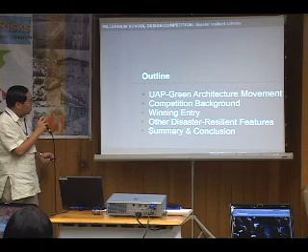I'll talk about what we are, because I think this is our first exposure to a multi-sectoral group. We'll talk about the competition which we launched, which came up with the ideas of disaster-resilient school. I'll cover in detail the winning entry, which will actually be built. And then we'll cover other interesting disaster-resilient design strategies in the other entries, and we will close the thing.

I'm given only 15 minutes. Okay, it's 5:10.

What are we? We are the Green Architecture Movement of the UAP. We were started in 2000, and because of the need to continue our advocacy, we decided to reform ourselves as the Green Architecture Movement. And the reason why we're pushing it very hard is because, admittedly, 50% of all the energy usage in the world is due to buildings. So we are the guilty parties, and that's why we're trying to offset our effects on the world.

I have a co-member of the Green Architecture Movement, Architect Casus, there in an orange shirt, so you can see him very easily, and white hair.

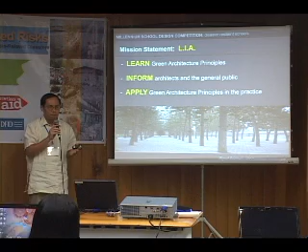So our mission statement is very simple. LIA: learn. We try to learn the principles of green architecture because every day there's always something new about green architecture. Second, we inform the architects as our primary objective, and then we inform the public in general. So we have actually several sessions on that. And then we apply green architecture principles in our practice.

Project modules, well, we have continuing education for members. We have a green forum every year, to which the public is invited. This year, we're holding it on September 4 and 5 at SMX. It's an open seminar. We talk about green architecture, etc.

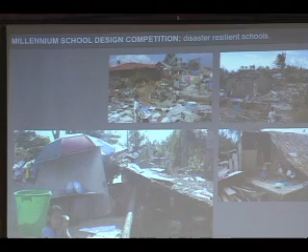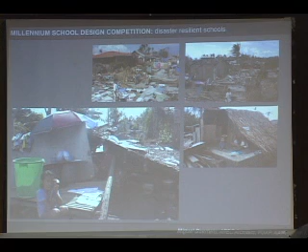Okay, now we start so that I can get the most out of my 15 minutes. We see this thing every year. Houses being blown by typhoons. We know that typhoons are going to hit us every year. Yet, every year, the same story. Houses get blown. Where do they go? Evacuation centers, which are supposedly the schools. These are the schools. Every year, the same thing happens to the schools. It's blown away, and they are supposed to be the evacuation centers.

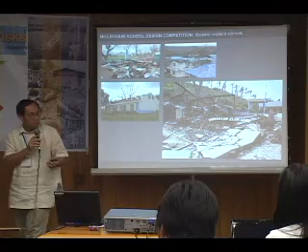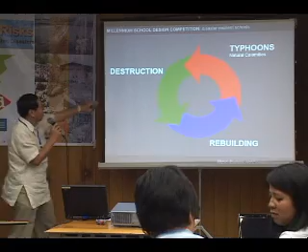So that's why, because of this cycle, we decided to look at something, the competition. Every year we know that typhoons are going to come. It's inevitable in our country. The typhoons bring about destruction. We rebuild. But what are we rebuilding? We are rebuilding exactly the same structures which we built before the typhoon, knowing very well that it will be blown away the next year. And we go through the whole cycle.

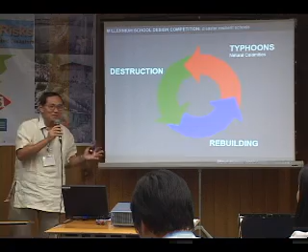In this, one time, somebody mentioned to me in private, "Negosyo yan." Sorry, there are foreigners. It's a business. Okay? So if there's construction every year, money moves, right? So I said no. As a group, we decided no, we're going to change this. So there was a group called Be Better, Build Better. It's a project in which we try to break this vicious cycle of calamity, destruction, and rebuilding.

So the partners are the following: National Disaster Coordinating Council, DepEd, Department of Public Works and Highways, the private sector, Disaster Management Network, I don't know if they're here, My Shelter Foundation, Philippine Green Building Council, Red Eye, which actually promoted the thing, and us, the United Architects of the Philippines.

Of course, the first step was to do a school. Why did we start with the school? Because they're the evacuation centers. Let's first fix up the evacuation centers and the schools before we move on to the houses. So we created this competition. We called it the Millennium School Competition. And the criteria was this, very briefly.

First, we decided let's have a design-build competition. Not only a design competition, because sometimes people join design competitions not worrying how it's going to be built and leave the headache to the people who are going to build it. So we said, you win it, you design it, you build it. Okay, so that means if you're going to design something, make sure it's going to stand up.

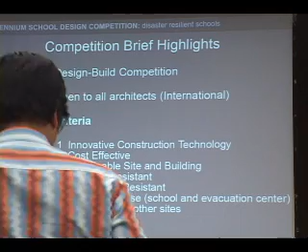Second, we opened this thing to all architects all over the world, anybody who wanted to come in with their ideas on how to design a disaster-resilient structure. We had 7 criteria. Number 1, innovative construction technology. In other words, if you do a standard school building, which looks like any other school building, you're out. Okay? Innovative, something new, something different.

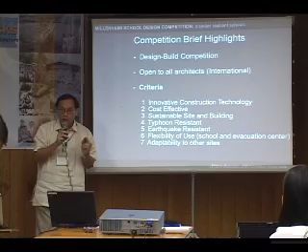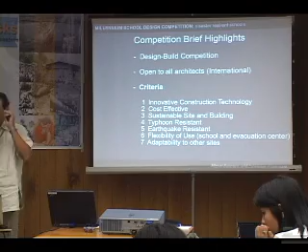Second, it had to be cost effective because the target which we're looking at was a public school. Third, sustainable site and building. Well, because we're the green architecture movement, we try to make sure that that whole school was going to be sustainable. Fourth, the most important factor in the Philippines is typhoon. Okay, this happened, so that's the most destructive.

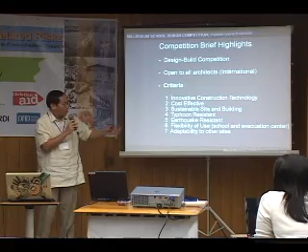Fifth, earthquake resistance. Sixth, flexibility of use. That school building can be used as a school and at the same time should be used as an evacuation center. And lastly, 7, adaptability to other sites. In other words, you can replicate that concept anywhere else in the Philippines or anywhere else in the world for that matter, which have the same conditions.

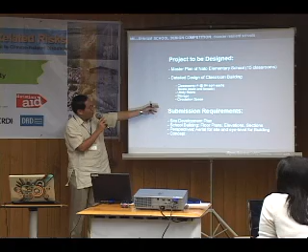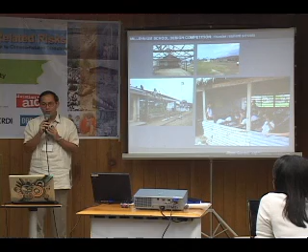So what we asked the competitors was to first design the master plan of a school, then detail 1 classroom building, and then they were supposed to submit the following boards. So, what site did we choose? We picked a site on the eastern shores of Camarines Sur, in a small town called Sagnay, and a small school called Nato Elementary School. So this is the site.

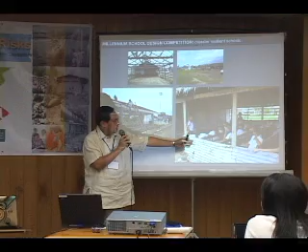Okay, we came in because of the typhoon. There were 4 classrooms which were in this condition, and before the DepEd was starting to rebuild, we said, okay, wait, reserve that site for us and for our competition because we're going to build the prototype in that area. So as you can see, the school, that's the building there, the whole school. This is how the temporary building looked like.

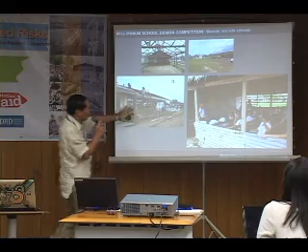And here you have the DepEd starting to build the same classroom they built last year and the years before, which got blown away every year. So anyway, we told DepEd, teka muna, reserve this site for us. So we went into this competition. Winners! Amazingly, the first place winner went to a Malaysian architect, Elida Himil, who received a prize of $10,000 US, and when she won, she donated it back so that the building could be put up.

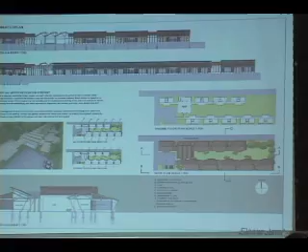Second place from the Philippines, Bronte Top. Third place from the Philippines, Nick Del Castillo. And then we had honorable mentions, Suzette Stoller from the US, John Bencerito from the Philippines, Joe Villante from the US, and Fuyuki Makino from Japan. Okay, let's look at the winner, Elena Hamil. This was her first board, but let's zoom into the more interesting parts.

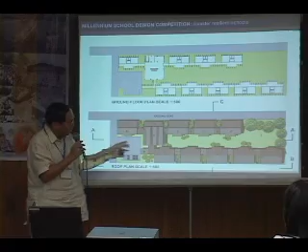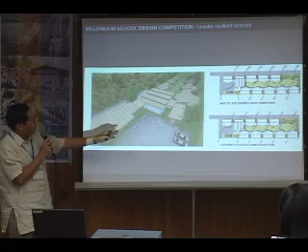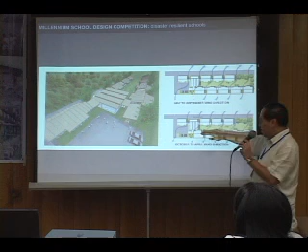Her master plan was basically a linear structure. Why? Because the property was linear. It's very, very, very long. So she had very simple buildings of 2 classrooms each. Why did she do that? Primarily because of the Amihan and Habagat. She put smaller clusters so that the wind can go across, also reducing the load of the wind. If you have a very, very long structure, the wind will be much stronger and go to the sides. That's how it looks.

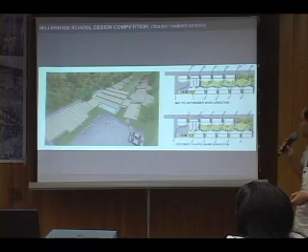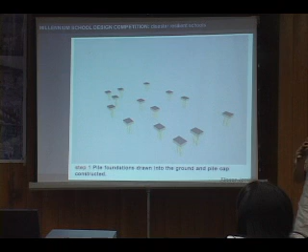The second board was this, and I'm going to focus on how she built the structure. It's quite interesting. So first thing, which we never do in the Philippines, put low piles and put a pile cap. You know these piles, I'm sure you only refer to piles when you do a high-rise building, these very, very heavy things. But these are very simple piles, maybe no more than 2 meters or 1 meter. Just maybe small concrete piles.

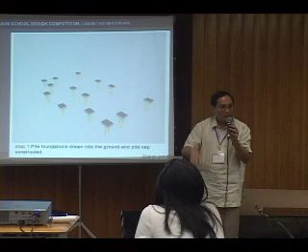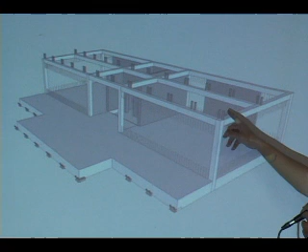And then put a pile cap. This means you're embedding the building deep into the ground, especially if the building is on soft soil. Second, put a concrete slab and put a concrete framework. Beams, columns, but then notice, these are all the pipes where we're going to add the bamboo later on. So we have a very sturdy structure, solid, reinforced concrete, and really embedded on the ground.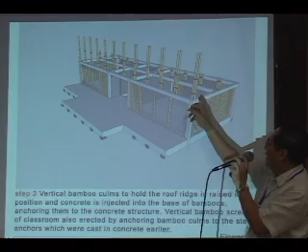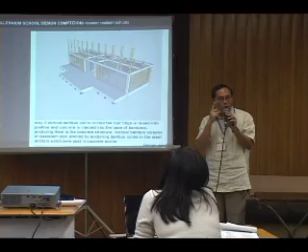Now, remember those bars here? So now where the windows were, we start putting the bamboos, and also the bamboos here. Notice one thing, the bamboos are always in 2s or in 3s. It's a redundancy system. In other words, if one of them is weakened or breaks, you can take it out and replace it without the structure coming down. A very interesting concept, that's why we said, oh, that's interesting. Redundancy.

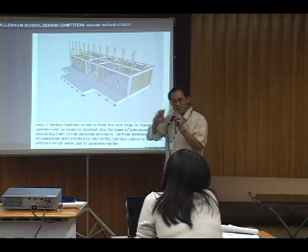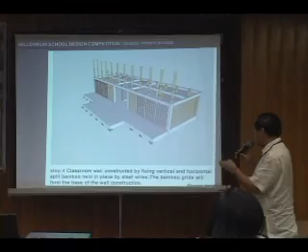Next, in this area where the walls were supposed to be, she starts putting bamboo. Actually, she's later going to cover that. And then through this, for decorative purpose, in the bamboo she puts little circles, because later on she will cover that with concrete. No? So bamboo behind, then she starts plastering the walls, no? With little holes. Decorative lang yan.

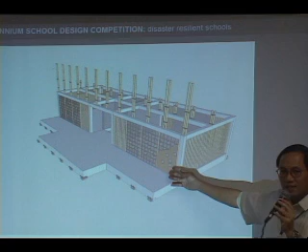But anyway, what is that? That is bamboo reinforced concrete. Actually, Architect Casus there champions bamboo reinforced concrete for the Philippines, no? So it's something cheap, it's no metal bars, and yet that is very, very durable.

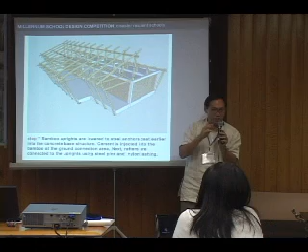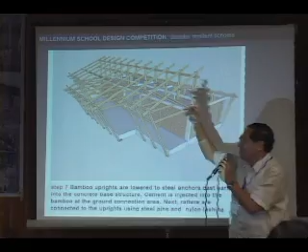Now she starts putting up the rest of the framework. Again, notice, duplication, redundancy. 2, 3, 2. Always, even these things, this is 2. Okay, the whole idea when I was reading her concept was that precisely if one breaks, you don't have to tear down the whole building. It will just probably get weak a bit. You can always add it later. No?

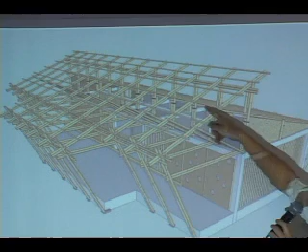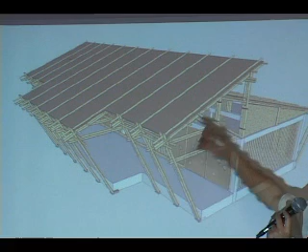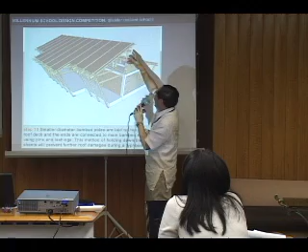So now she starts putting all the rest of the items and then puts the bamboo, it's a technical term, purlins. No? Because on top of that, she puts a GI roof, ordinary GI roof. And then finally, another thing which was quite innovative, we thought, she sandwiches that roof still with another bamboo. In other words, it's like, you know, some houses put rubber tires on the roof so that the roof doesn't fly. But this one is a more sophisticated, simple way. Also bamboo, strapped between the rafter here and the one on top, so it's really held in place.

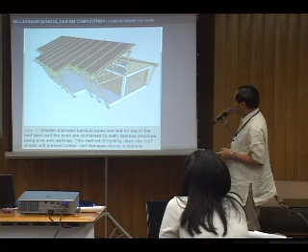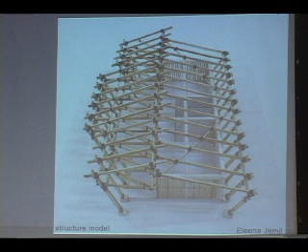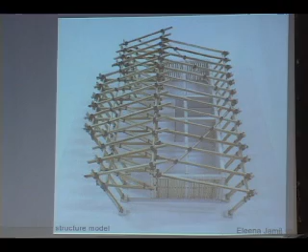These are all lashed with nylon ropes, no? Lashing only, no nails. So they're all anchored to the pipes here, all lashed tight together. And it's very resilient, even has a cross bracing here, so that it doesn't move. No? It's very simple and very, very green.

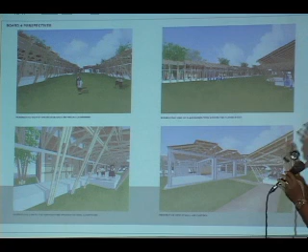These are perspectives of the building. Notice that in between all the school buildings, she has a clump of bamboo. Precisely because that's where you're going to get the very same material to maintain or rehabilitate your building should the need arise. Okay, so you notice it's very interesting. It's a combination of reinforced concrete, bamboo, and bamboo reinforced concrete. No? It's very interesting, as you can see. It's very nice, very pleasant.

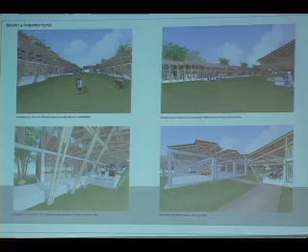Then even the material itself can be related to the people in the locality. In other words, it's not something foreign. Most likely their houses are also using the same material, bamboo.

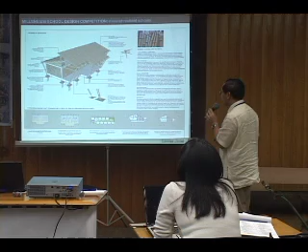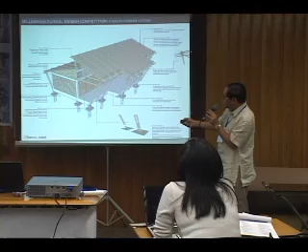Then our concept board, we'll just focus on a few things. So again, the finished building is like this. Bamboo reinforced concrete with holes, decorative. Then we have full bamboo with gaps of about 100 mm, 4 inches, so that the breeze goes through. We have a 2-level roof, so that there's cross ventilation and light coming in, especially there, that's all open. Columns, and then we have the piles.

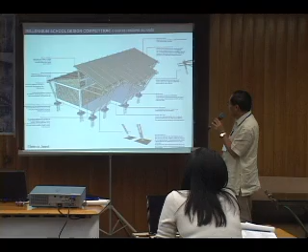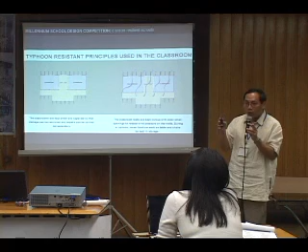No? So what did she say in her board, which were her typhoon-resistant principles? Number 1, although we asked for 4 classrooms, she broke it down into 2-classroom modules. So, smaller, so that in case it is damaged, the damage is restricted to one structure. Because if she had put 4, which we were requesting, then it would be a bigger building. So it's smaller, you just duplicate that.

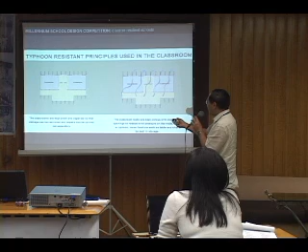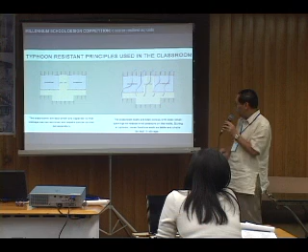Secondly, the classroom walls are actually porous. These are not windows. There are no glazed windows or glass windows. Actually, they are just bamboo with small gaps. The major light comes actually from the high ceiling. So these are the classrooms, and these are the 2 bathrooms, which are also used should it be used as the evacuation center. No? So cross ventilation. She lets the wind through.

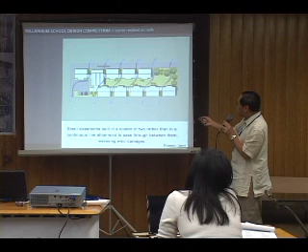On a master scale, which I mentioned earlier, on the master plan, you have the breeze coming through. These are all these small pocket gardens which have the bamboos.

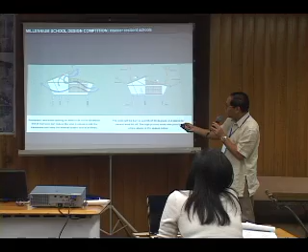Second, here she lets the breeze come through. You'll notice all the light of the classroom will enter through this area. And then her roof slopes...

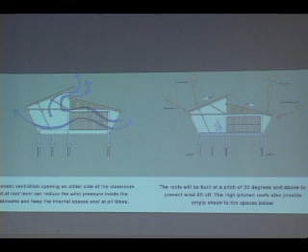...are 30 degrees. I was conferring with a colleague of mine, an architect, because he did a master's on disaster resilient structures. He said really for typhoon resistance you need an angle between 25 to about 45 degrees, so that the wind is good. So this is 30 degrees, it matches perfectly with her findings. I'm glad that it's there.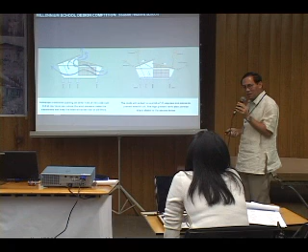Right now the condition of this structure is that there's a local architect who is trying to localize, so to speak, the details because the winner is from Malaysia, and we should be building it soon there in Sagnay. Actually, it's really far, about an hour's drive east from Naga City, really there on the shores.

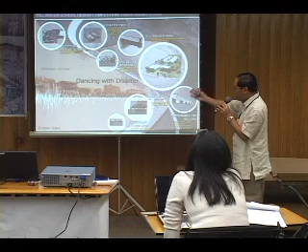Okay, what were the other winners? Second place, Brown Dito, interesting concepts. Number 1...

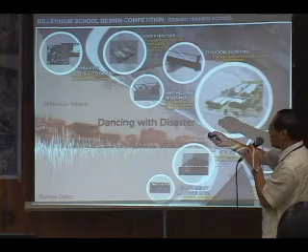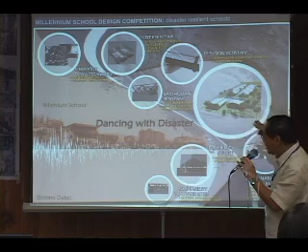...W steel frame. And the consequence of that, the walls are not straight. The walls are inclined and it is raised from the ground. Why? When the wind blows, the wind does not hit the wall, but it goes down and goes up. Interesting concept. Third placer, Nick Del Castillo.

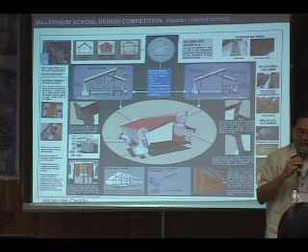In disasters, in typhoons, normally what first goes are the roofs. It starts off with the little corners starting to peel off because of the wind and continues until the whole roof goes.

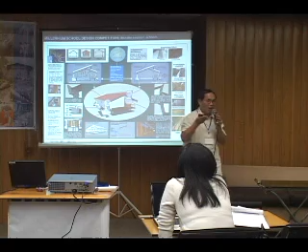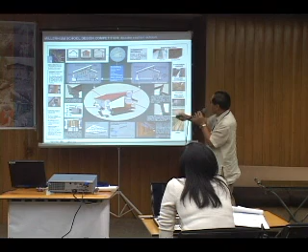He put a block on the roof edges, notice? Here also, here it's raised, so he protects that. Secondly, same principle, although he also put all his walls at an angle so that when the wind blows, it either goes under, it's also raised, and it goes above. Interesting concept. This one, Joe Brillianti from the US, of course.

Just an interesting concept: storm boards or shutter boards. So during normal days, it's used as a media agua, and when the storm comes, you shut it down. This is the most interesting, although it shifts the wind.

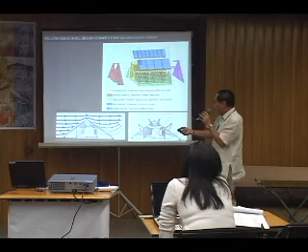This is the idea of deflecting the wind above the structure. And the interesting thing here is this—let's focus on this. This yellow thing could be an existing building, an ordinary building.

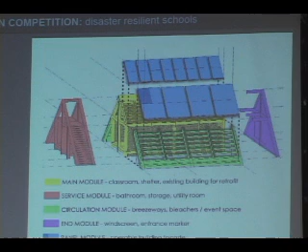You add this green thing, which corresponds to that, sort of to deflect. For a school building, she said this can be used as bleachers for the field. You can also pass through under here, so it becomes an external corridor. Then she adds the edge units. In other words, the interesting concept here is that you're deflecting the wind, and at the same time, you can actually retrofit an existing building to be able to deflect that wind.

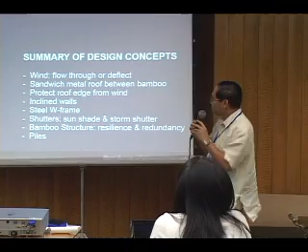So in summary, I'm ending. What concepts were placed on those boards? Number 1, wind is critical, so you either deflect it or make it pass through.

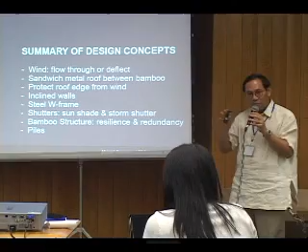Second, the interesting concept of sandwiching a metal roof between two bamboos, then protecting the roof eaves from the wind. Third, inclined walls, because if your wall is straight and the wind is blowing, you're 50% already toppling down on the side, but if you have it inclined on one side, then you need a greater force to move it or push it out of place.

A steel W frame, which was shown in the second place winner. Then the concept of shutters, which can be used as storm shutter or sunshade. And then the concept of using bamboo for its resiliency and the concept of redundancy. Besides, it's sustainable because if you plant bamboo in the very same project site, then you can actually use it.

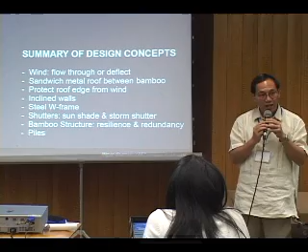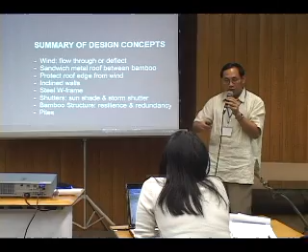And then something which I try to analyze here, the use of piles, something which we can maybe introduce to low-cost structures, the concept of putting piles. So this was a competition for school buildings.

So with this group, I don't know if you're ready for this, but maybe we should also organize, with your help, an international competition for disaster-resilient housing and communities. And therefore, maybe if we succeed in that, maybe 2 years from now, I can come back and give you the results. So with that, thank you very much.